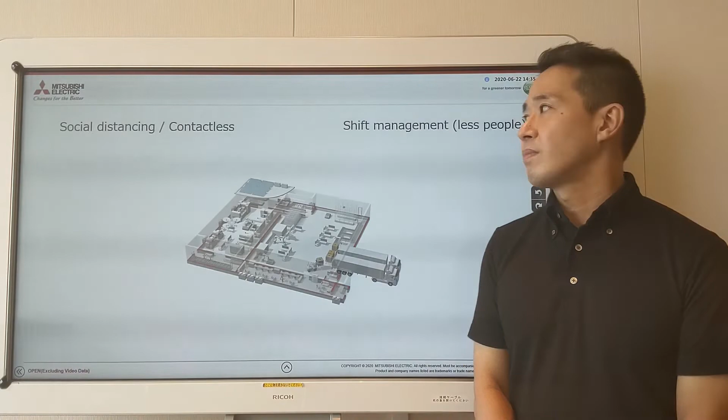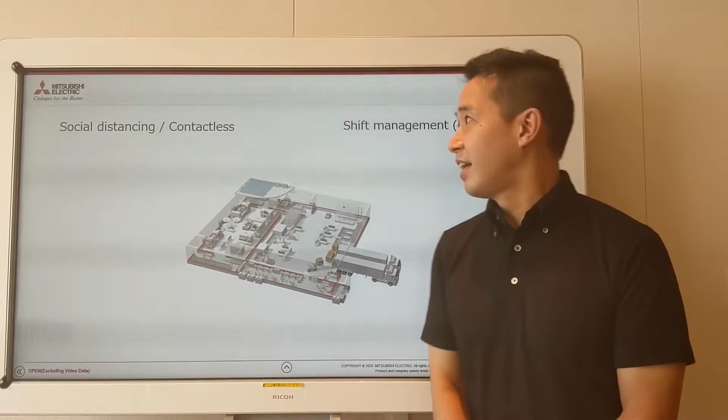What's changed inside the factory? I think there's 2 main points that have changed. The first thing is we are going to need to do social distancing and contactless. The other thing is shift management, meaning we have to manage the factory with less people.

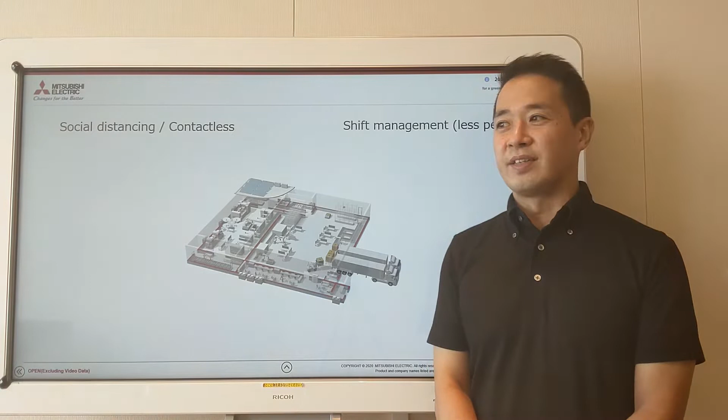First, about social distancing and contactless. I think you can imagine, every day in the restaurant you say take your social distance, but it's the same in the factory. We can't afford to have 2 people close together. They have to take their distance 2 meters away.

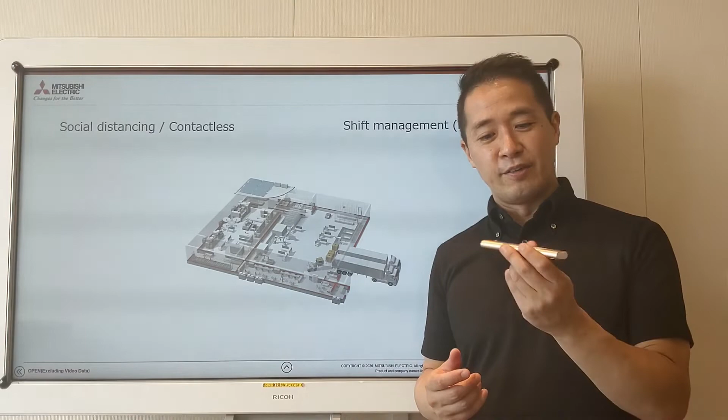And the other thing is contactless, meaning in a normal factory you would have one product flowing out the line, but in this case, this product may be the carrier that will infect everybody throughout the factory line. So you want to reduce this contact as much as possible.

In order to accomplish this, what do you need? I think there's a couple of things. Of course, doing more machining or putting more robots inside your factory line is an obvious choice. If the machines are doing the work and humans are not, then you reduce the risk of having infections.

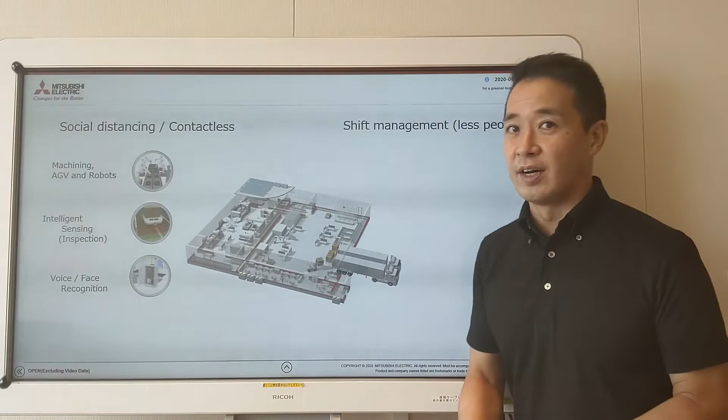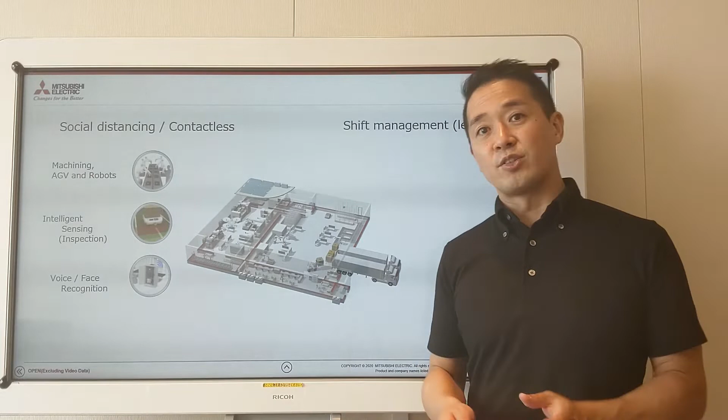The other thing is also sensing and inspection. In the previous days, you would do it by eye, using a hand, touching the product. But we have all this cool technology with image recognition and vision inspection. So why not use this technology more in the factory to avoid contact?

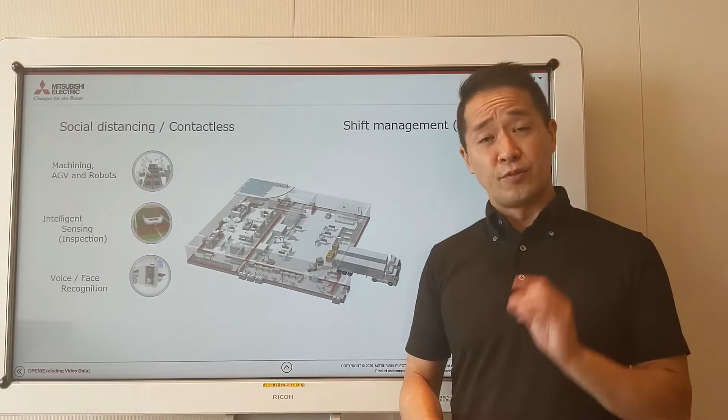And the other thing is voice and face recognition. There's a lot of buttons in the factory. You're pushing a screen, you're pushing a button, but this is also some risk to become contagious. So in that case, if you can use your voice to control things, why not?

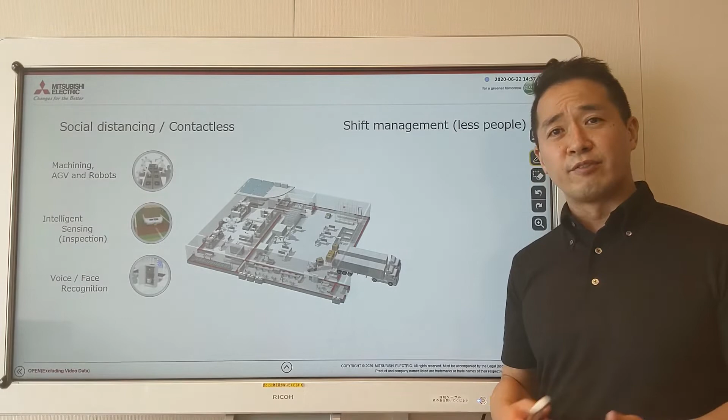The other aspect is shift management, meaning less people. We're doing this also in our factory. It's very risky to have one shift with all the crucial people for the production line working at the same time, because if you're unlucky and somebody gets infected, you have the risk of shutting the whole factory down, and there's nobody who knows how to operate the line.

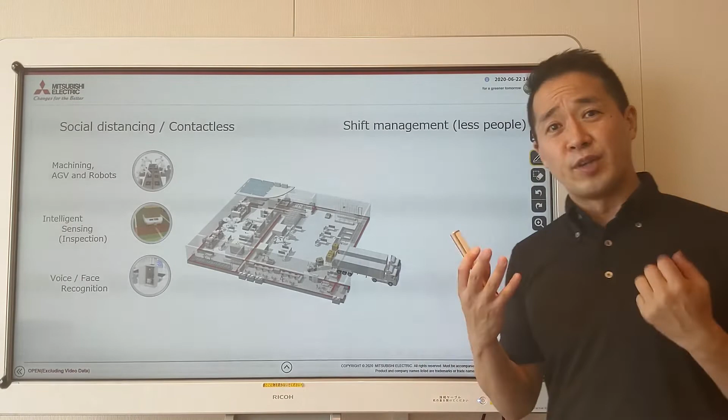So what we're doing in our factories is we're dividing up the people in shifts and making sure on these 2 shifts that there are people that know how to keep this production line running. If we can do that, even if unluckily one shift was affected, we still have the other shift able to continue production, so we'll still be operational.

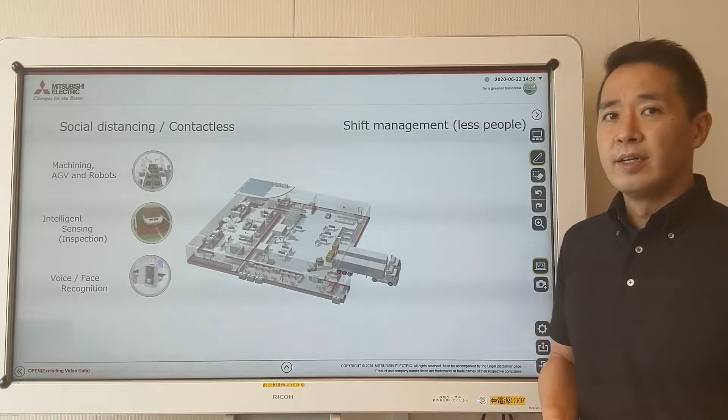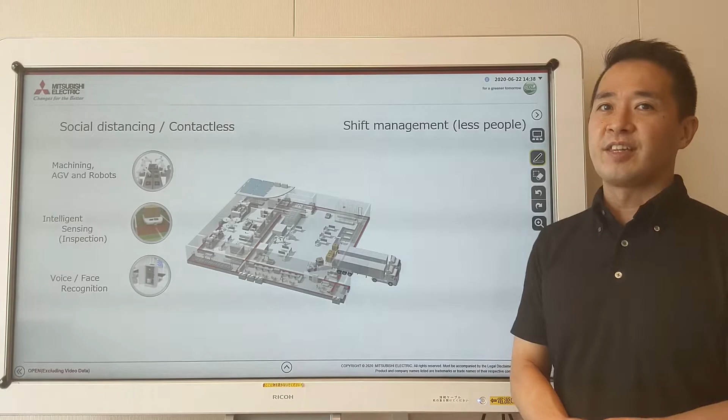So think about this. If you think about shift management, it means 2 things. One, that you're going to have to manage with less people, which means you're going to need more automation. And the other thing is you're going to have to grow the knowledge level of the less people, because there's less people to run the line, meaning they're going to have to do more multitasking. And in order to do multitasking, you have to teach them first, to educate them to learn some of the tasks or operations that they didn't know before.

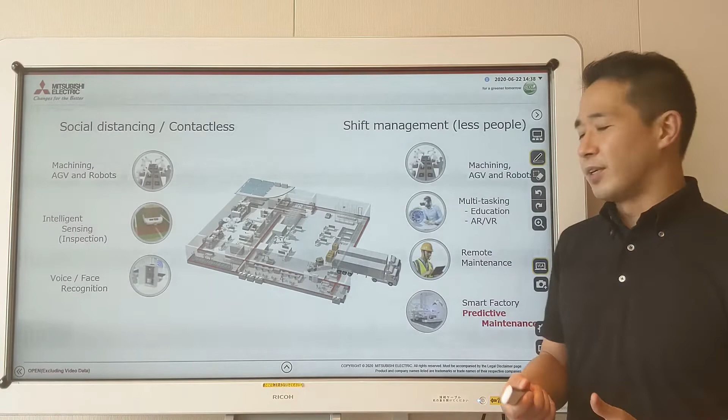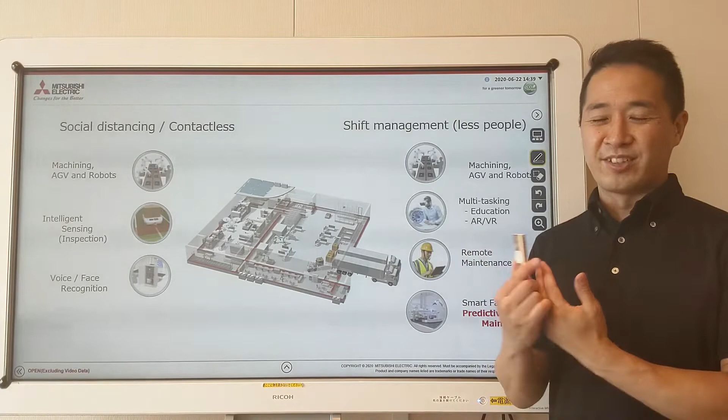It's really hard to do education now, because education is standing next to the worker and teaching how to do things, but that's not obeying social distancing. So I think we're going to be seeing more AR and VR tools to make education easier.

One more thing is remote maintenance. Of course, you can't transfer all the skills, so there will be times where you're off shift and a big problem happens in the production line, where you don't have the right staff because you're separated into two. In that case, it's vital for him to remotely access the factory, see what's going on, and send advice to the staff working on the factory floor to fix things.

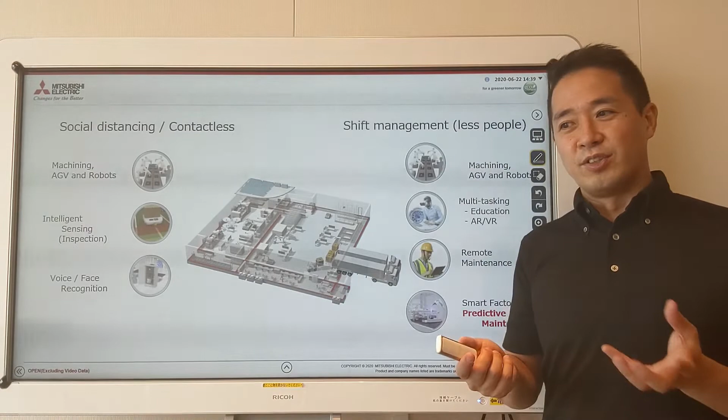And this is the same with overseas trips. In the past, big problem, you'd sometimes even send an engineer over to the factory overseas, but now you can't do that because he's going to be confined for maybe two weeks before he can get into the factory. So that's why remote maintenance is so crucial.

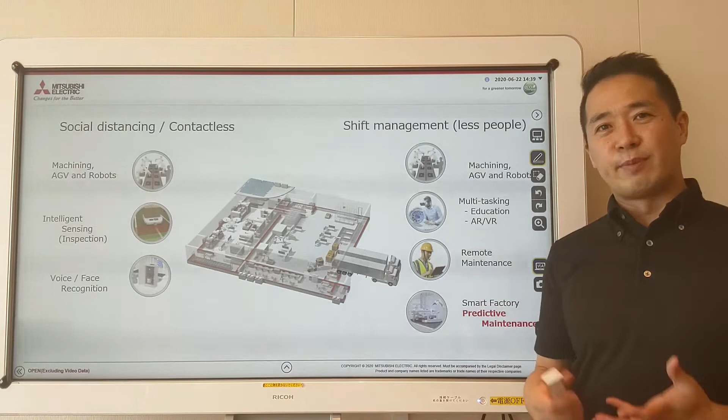The next step, and the ideal step, is making a smart factory where you don't need people to do the maintenance work. The AI and the cloud figure everything out and do predictive maintenance for you, so it's easier to work with fewer people. Today I'm going to talk a lot about predictive maintenance, which I think is very important to find problems that might occur in your factory.

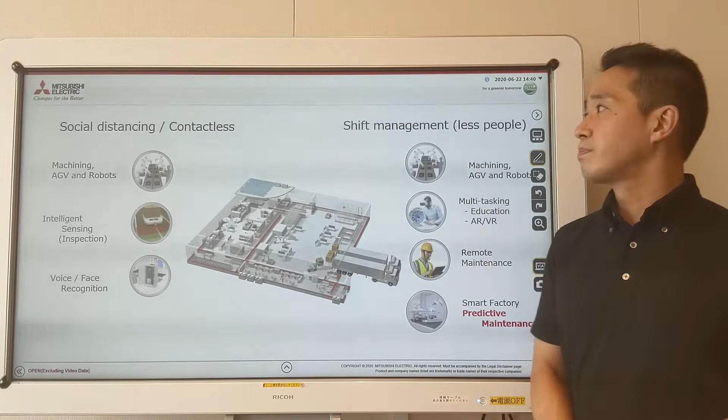Your nightmare starts here. It's the little things that start a big problem in the factory. For instance, there's a gearbox here, but this red gear breaks and the entire factory stops, and it's usually a disaster. But the problem was very, very small.

I'm going to tell you a kind of story, but I'm going to go backwards in time. Right now, there's a guy who's holding his head. It's because the factory line stopped. A machine broke down. He tried to find spare parts to fix the machine, but the supplier says, oh, hard luck, this is a special part, so you're going to have to wait two months. So he has to wait two months, and the production line is going to stop for two months. It's actually a disaster, and that's why he's holding his head.

But if you look at what happened before this, minutes before, some smoke came up, and something was wrong, and they found out there's a problem.

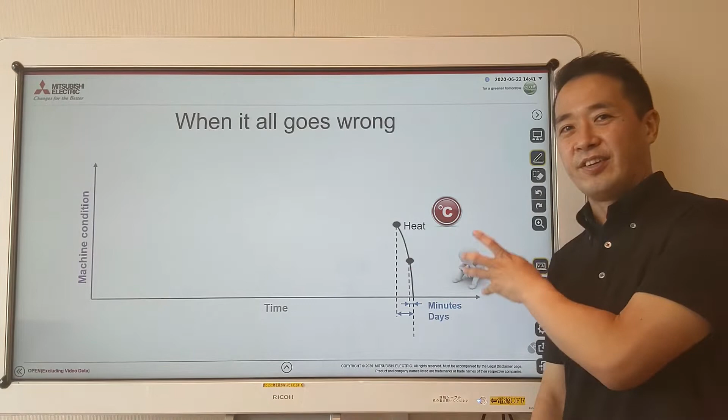But if you look at days before, actually this machine was gaining heat, it was getting a little bit hotter. If you touch the machine, it was a little hot, but nobody found out and decided to do anything about this.

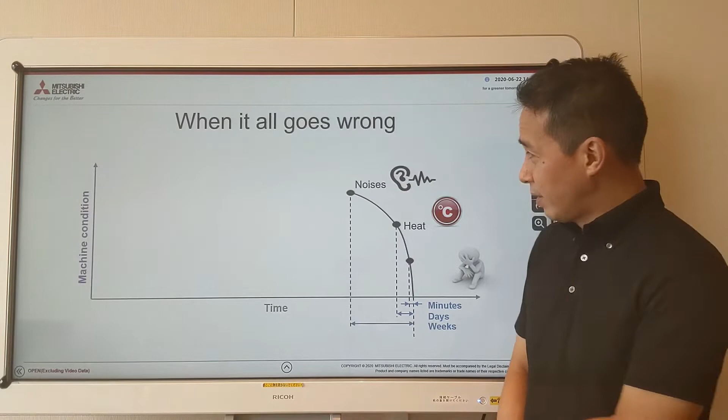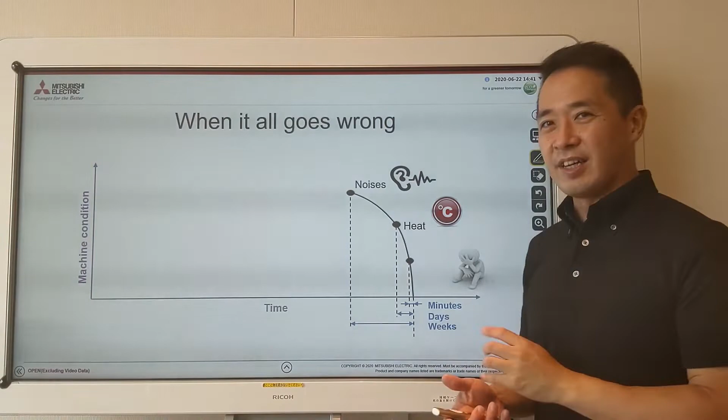Before that, weeks ago, this machine was actually putting out a very low sound that people's ears couldn't hear. But it's because a kind of screw was getting loose, and then the panel was getting loose and wobbling, so that's why they had this strange noise.

And if you go before that, actually there was a little vibration months ago, but nobody was paying attention. It was very small, so nobody noticed it. But the screw was getting loose over here.

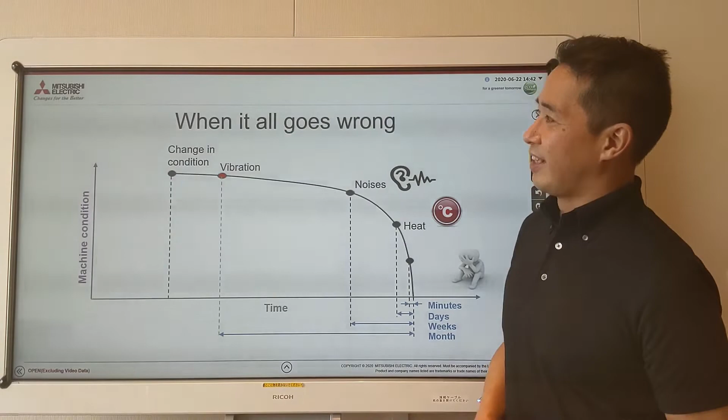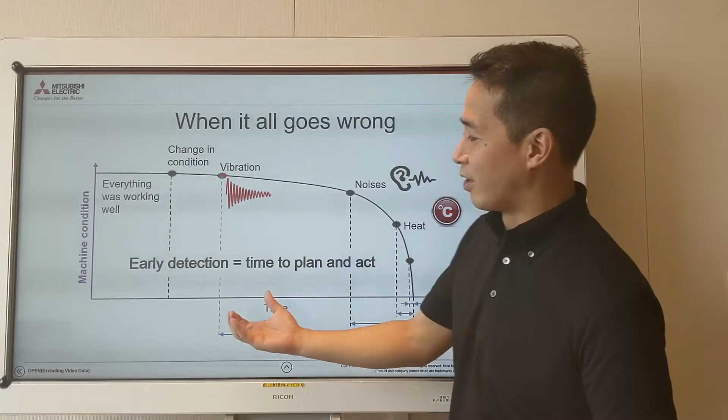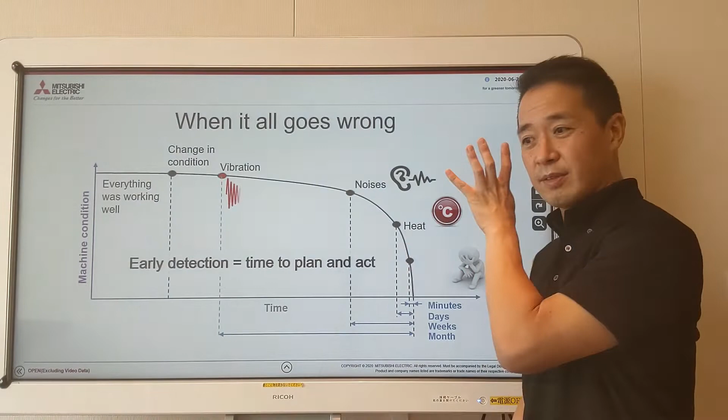What I'm trying to say is there was a change in the condition months ago, and if this guy was able to detect that before it happened, he'd be able to do something. He'd be able to say, okay, this is a bad trend, so just to be safe, I should probably order some spare parts for this. And that way, if something happens, I can exchange the part. If he had done that, he'd have the spare part in time, and he would be able to avoid this massive shutdown that he actually has. So finding out this kind of change in condition and vibration beforehand is very important. That's what we're talking about when we talk about predictive maintenance.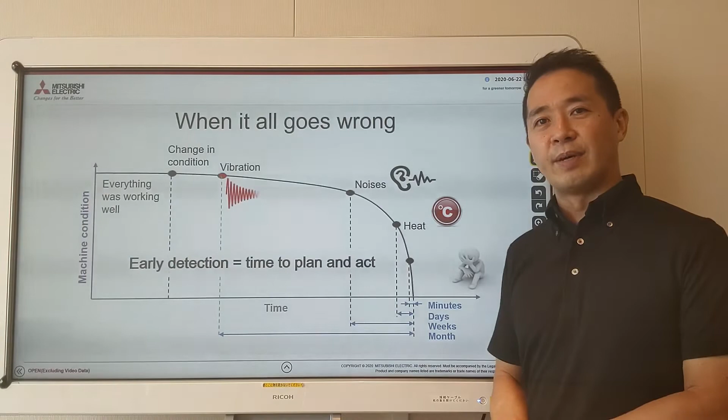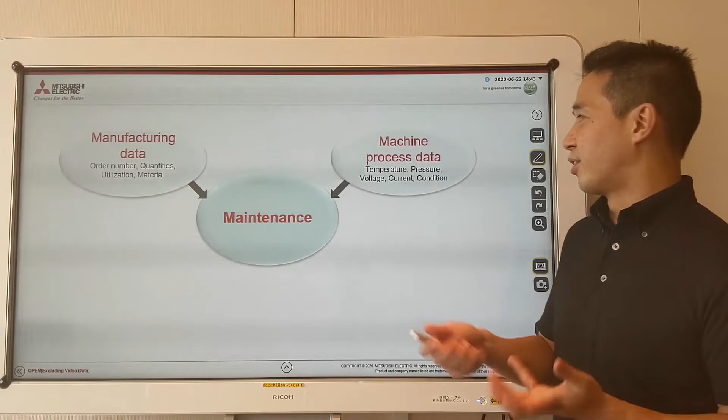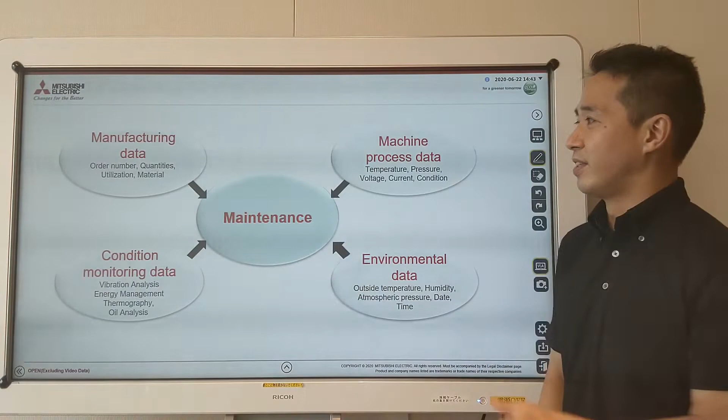For maintenance, you need data. So what you're looking at is the manufacturing data, what you're producing, the time. Also very important is the machine process data: the temperature of the machine, the pressure, the voltage of the motors, the current, those kinds of data. Also, environmental data is very important, especially in predictive maintenance. We're talking about temperature data, humidity data, atmospheric pressures, and also you need some kind of maintenance condition monitoring data, like models and mechanisms to absorb this data and figure out when it's going to break. So maintenance is about collecting data and utilizing data.

Your final goal is to install a 24-hour doctor. What I mean by a 24-hour doctor is, usually when you see a doctor, he says your blood pressure is going up or you have too much blood sugar, and every 3 months you go for a normal checkup. But sometimes every 3 months is too late in a factory. You need to find out if something's going wrong the minute it's going wrong. The best way to do that is to have a doctor always looking and checking what your health is doing. That's what we're talking about with predictive maintenance systems: installing a 24-hour doctor that is constantly monitoring the system and health of your factory.

But you can't automatically make a predictive maintenance system. It always starts with collecting data. If you don't have any data, you can't do any maintenance, you can't analyze it, you can't visualize it. So you always need to start with sensing, putting sensors on, collecting the data. Later, you can visualize this data and put it into charts. If you can put it into charts, then you can decide when something is going wrong, and if something is going wrong, make sure somebody knows about it by sending out an alert.

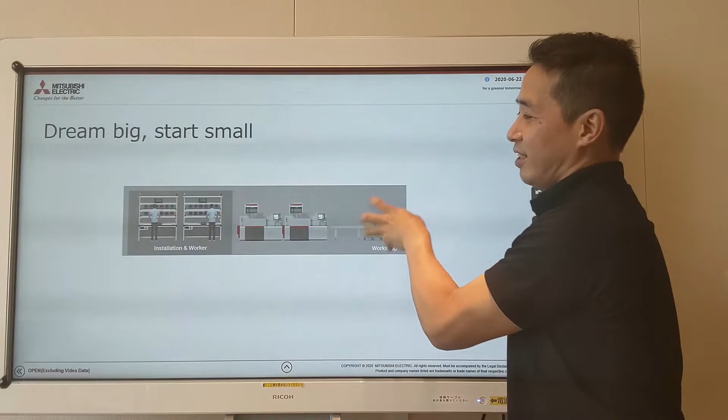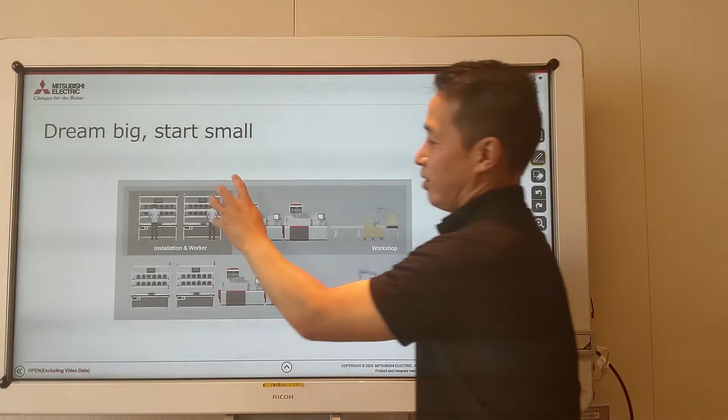Also important to know is that predictive maintenance in a factory is a step-by-step process. You don't start with the whole factory. In order to do predictive maintenance for the whole factory, you need to start with small things like a cell. When you're able to do predictive maintenance for that specific cell, then you move on to the next machine, and the next machine. If you're able to do predictive maintenance for these individual cells, you'll be able to do it for an entire production line. So first things first—you're dreaming big, but actually starting small. After you do the factory line, you move to another factory line, and finally you'll be able to do predictive maintenance as a whole for your factory. But everything starts with the individual machines.

It looks a little complex, but depending on the way you do it, there are simple ways to do predictive maintenance, and I want to show you some examples of how simple it can be. I'm going to start with the example of a wastewater treatment plant in a small town in Germany. Let's go into the details.

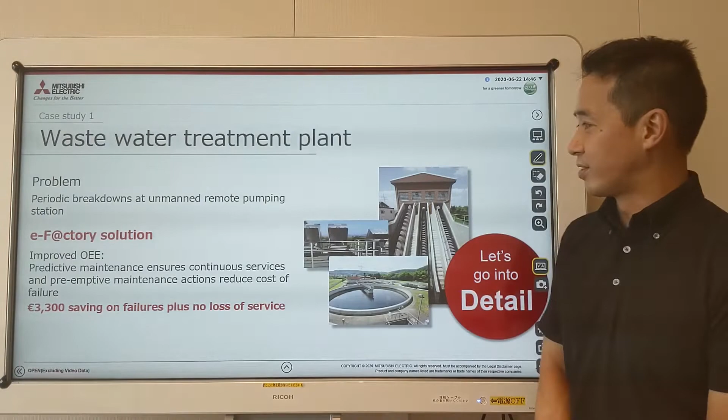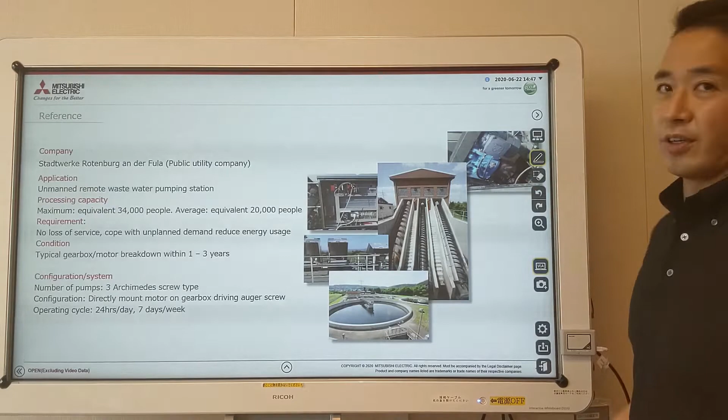This is the application: it's moving wastewater from the bottom side to the upper side, and it does this using three Archimedes screw pumps. These are moving by using a gearbox and a motor, so rotating. The issue with this application is this is an unmanned plant, meaning there's no person working in this facility, and the screws break anywhere between 1 year and 3 years.

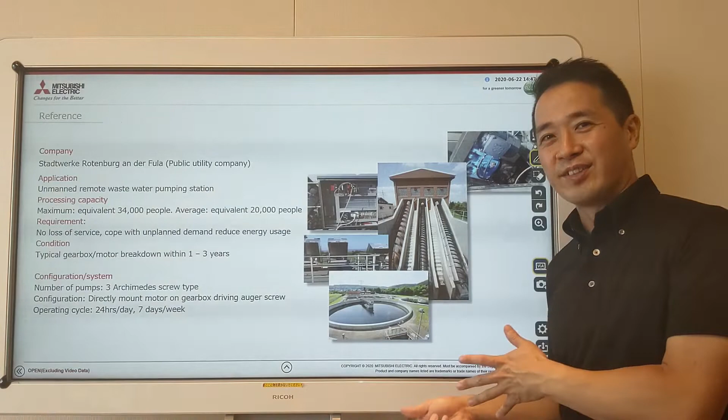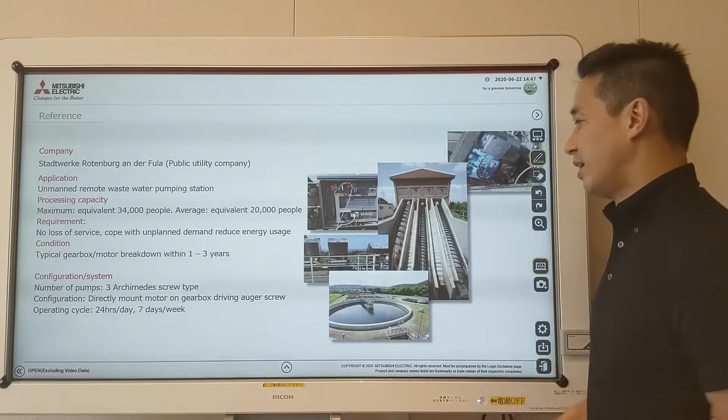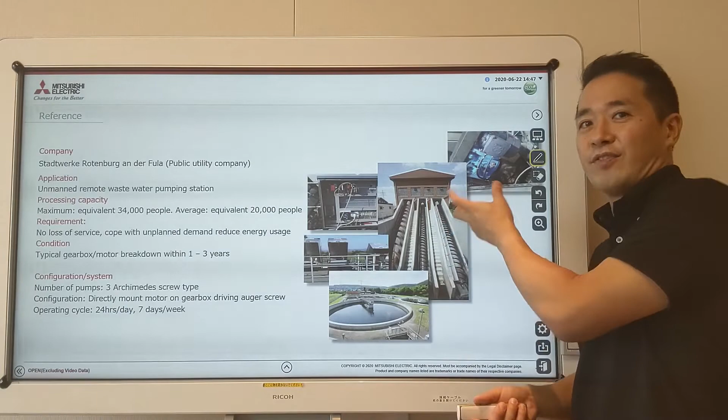So you can never predict when it's going to break. The reason is, when it breaks depends on how much garbage people are throwing into the wastewater. If a lot of people throw a lot of garbage in the wastewater, the load on the screws becomes bigger and it will break faster, for instance in 1 year. On the other hand, if people aren't throwing away a lot of garbage and the water is clean, the load is less, so it might last 3 years—but you never know. This depends on everyday life.

So what they wanted to do is periodic maintenance, meaning every 6 months they go and check to see if everything is okay, then go back. But sometimes they got an alarm that it was suddenly breaking and everything was overflowing, requiring immediate action. They wanted to fix that and be able to predict when it would break, so they could fix things before the actual trouble happened.

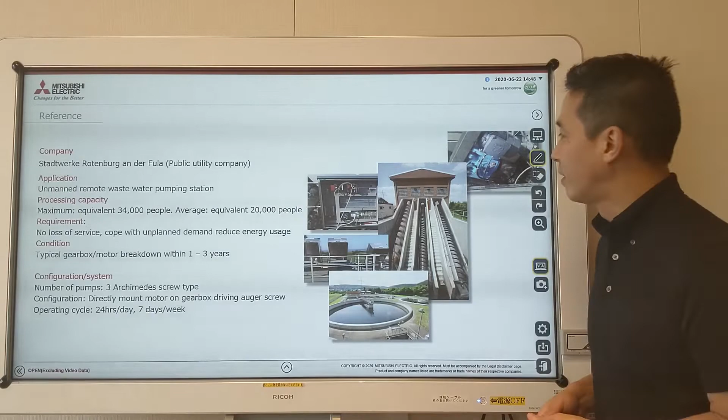So what they did is they installed a predictive maintenance system, a 24-hour doctor. It's very simple. When you think about predictive maintenance, a lot of people think you have to put sensors all over the place. But if you look at this specific application, usually the gearbox breaks 95% of the time, because the screws are connected to the gearbox, and this has the most load.

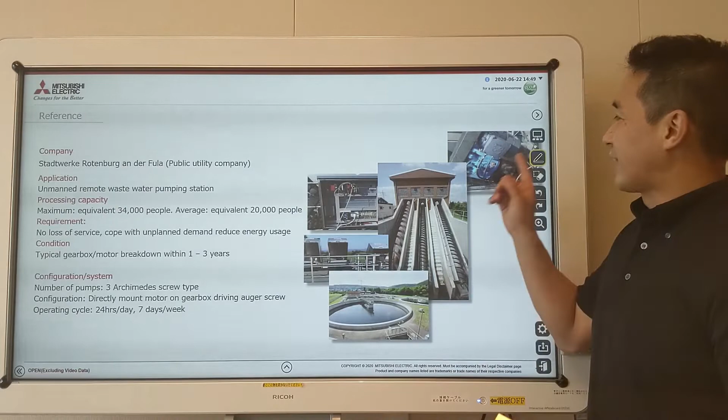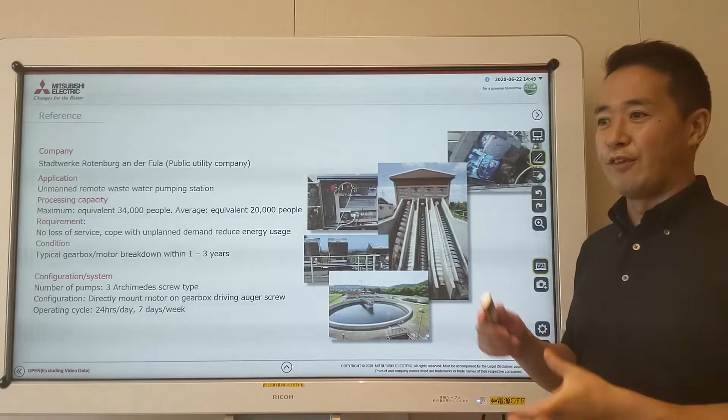If you look at the gearbox, it's connected to a motor that's rotating the gearbox. And what we did in this case was we put a smart vibration sensor on the motor, because if it felt more vibration, then we know something's happening, something's going wrong in the gearbox, and then we could send out alarms. So it's a very, very simple system.

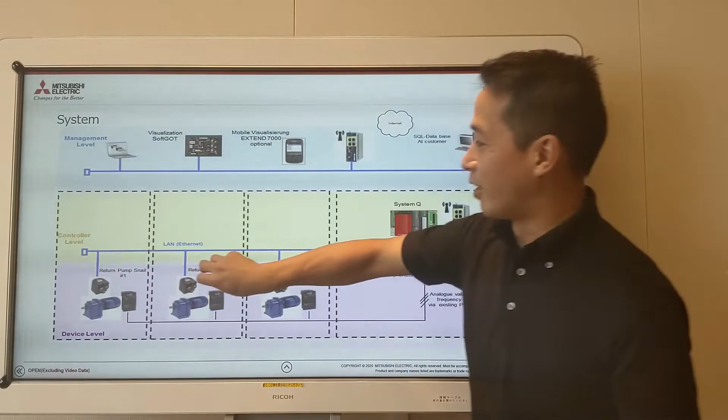As I said, we just have 3 smart vibration sensors placed on the motors on the Archimedes screw pumps, connected to a PLC, and then remotely we connect this to the central maintenance center.

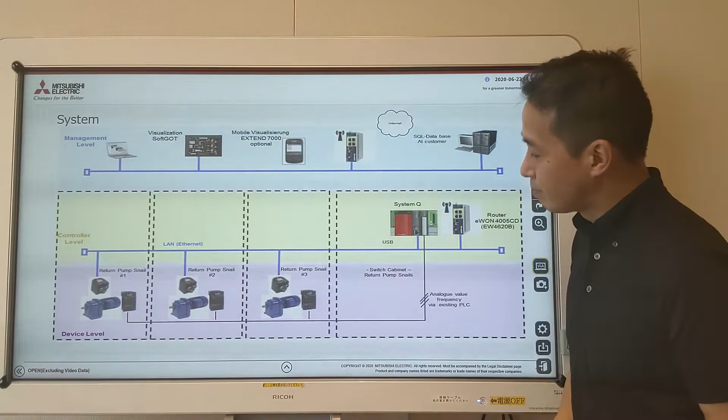So what's the benefit of this? First of all, if you wait till the gearbox breaks, a new gearbox costs about 5,500 euro. On the other hand, if you can fix the gearbox before it breaks, an overhaul costs only 1,000 euro. So you save 4,500 euro just by doing this.

The other obvious benefit is you don't have any complaints from the city if something goes wrong, and it's not an emergency to handle these kind of situations.

So the cost of this was roughly about 5,700 euro, meaning that 2 gearbox failures is about 11,000 euro. So if you think about that, 2 breakdowns, and then you've already saved the condition monitoring system you've invested. So the ROI is very, very simple and achievable.

And it's a very, very simple application, as you see. And we were able to develop this with the partners, with Schaeffler, with a system integrator, and we did the remote connectivity with eWON and HMS.

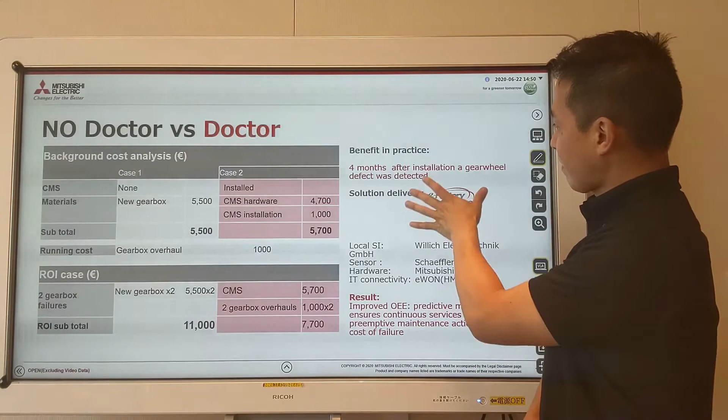And luckily, it worked. 4 months after the installation, we got an alarm that the vibration patterns were not so good. It was different, and we went and found the gear wheel defect. So it's a very, very simple solution, but very, very effective, and you also get the ROI.

Next, I want to talk about maintenance on the edge. Lots of people have this image of doing predictive maintenance in the cloud, but in reality, you have no time to talk to the cloud when you're doing predictive maintenance.

Think about a smartwatch where you're monitoring your heartbeat. If something goes wrong with your heartbeat, then you immediately have to call an ambulance, and you have no time to do the analysis. It's a split-second decision you have to make. And that's exactly what the factory is.

We're moving in not seconds, not days, not minutes. We're moving in the millisecond world and the microsecond world with processing and all this precise information. And if you're a split second late in reacting, you're going to damage a very, very expensive machine or a very, very expensive part that you're producing. So that's why timely reaction is so important for predictive maintenance in manufacturing.

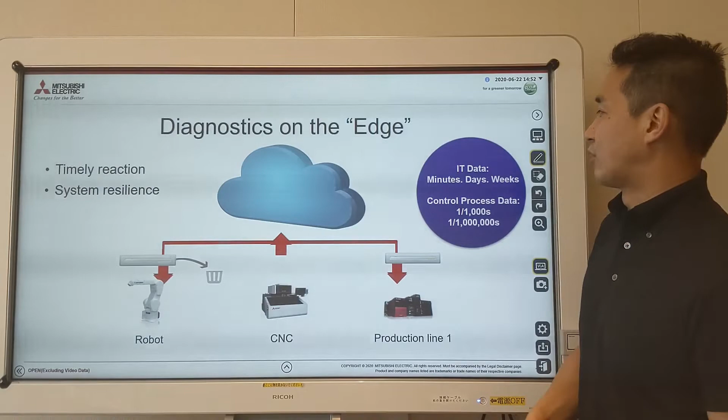Everything has to be on the factory floor with an edge computer. I have another YouTube video about edge computing, so if you're interested, you can go check it out and see why edge computing is so important for the factory floor.

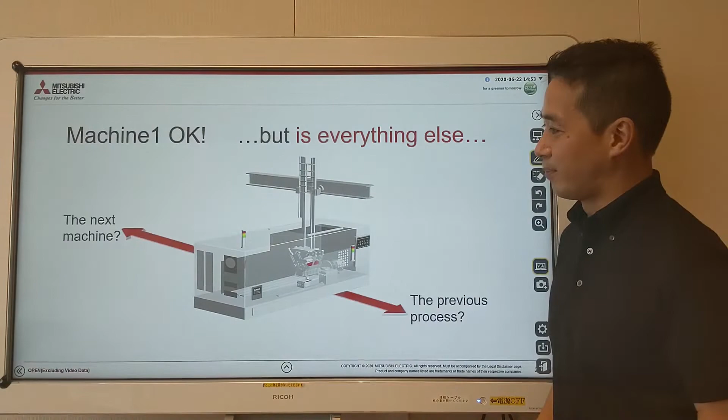Okay, so we put predictive maintenance on one machine. We're monitoring the motor, vibration on the motor. But the issue is that we're so interconnected right now in our factories. Even if you can predict something and predict a break on this machine, you have to think about what happens before in the process and what happens afterwards.

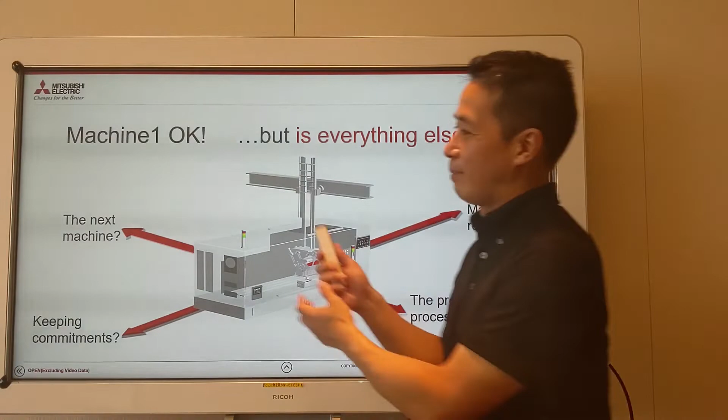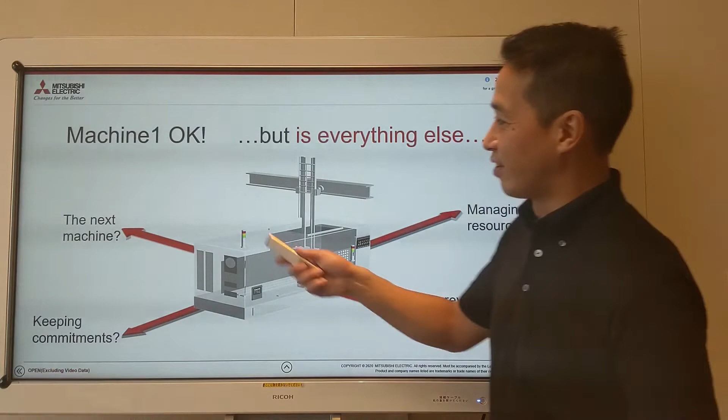Because if this machine is going to break and you have to do maintenance on it, that means you're going to have to stop all the manufacturing processes before this, and the other manufacturing processes after this are going to be stopped as well. You have to think, okay, this person that's managing the machine has nothing to do, so maybe I should put him on another task.

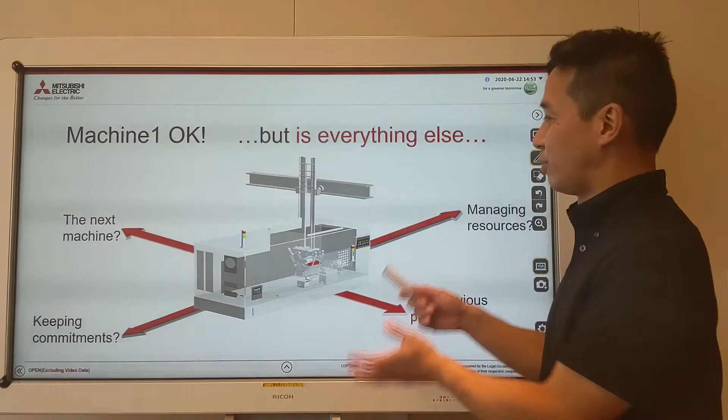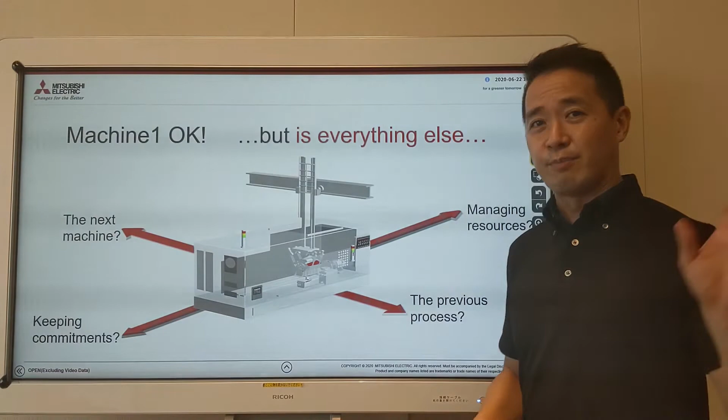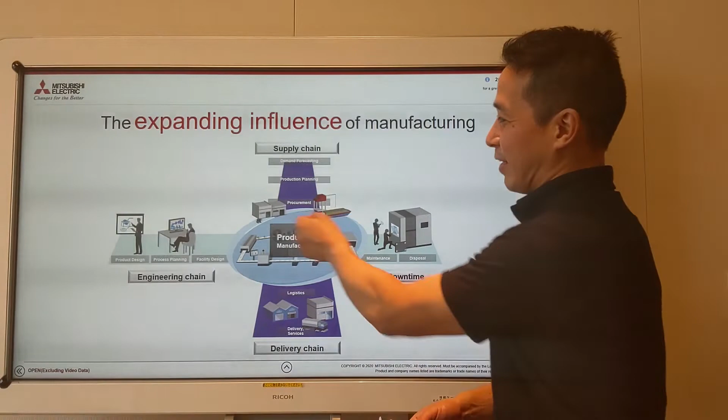You have to think about parts incoming from your suppliers. Maybe you need to fix a machine for 2 days, so you tell the supplier to wait, you don't need product then. In the past, this was done by experienced factory staff who knew who to call and what to do. But it's becoming more complex because the supply chain and delivery chain are so interconnected, and engineering chains are connected too. Managing the impact of what happens here on over there is very difficult with the human mind.

That's why I think AI will have a bigger role in the future, because AI has the capability of figuring out what impacts what when something goes wrong.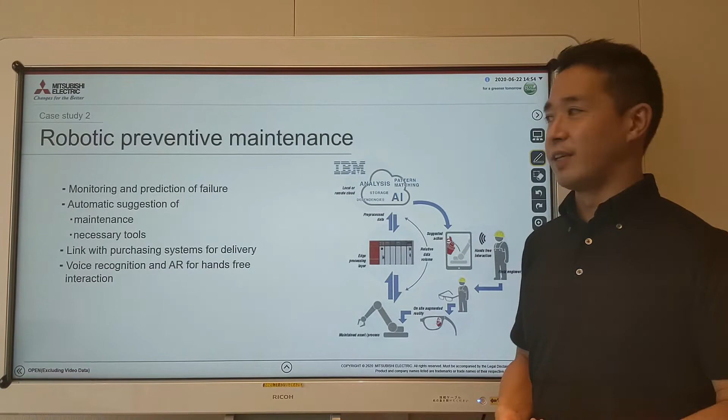This is just a sample application, I have more detail in my Smart Robots presentation. We're monitoring a robot with an edge computer, and in this case we're talking to IBM Watson AI, figuring out when something's going to go wrong and what to do about it. This is the actual maintenance screen, detecting what's going wrong.

We have a robot that's going to fail, and in the future I think it will be like this: a chatbot box opens, we talk to the AI, and the AI tells you exactly what to do.

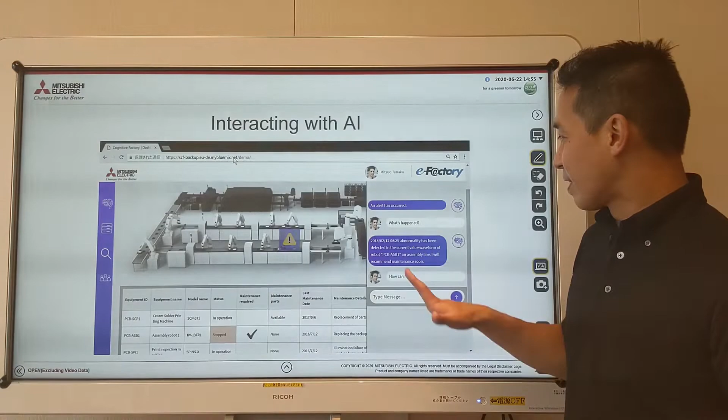In this case, it says there's a current value, a bad waveform in this robot, so here are your maintenance options. You check one, and it tells you we have these parts in stock, so it's okay to do maintenance, or we don't have it, so I'm going to go to the SCM system and order it for you.

Is that okay? It's going to be easy, because the AI decides everything for you and tells you the right options, adjusting your maintenance schedule. I hope this technology becomes more and more refined.

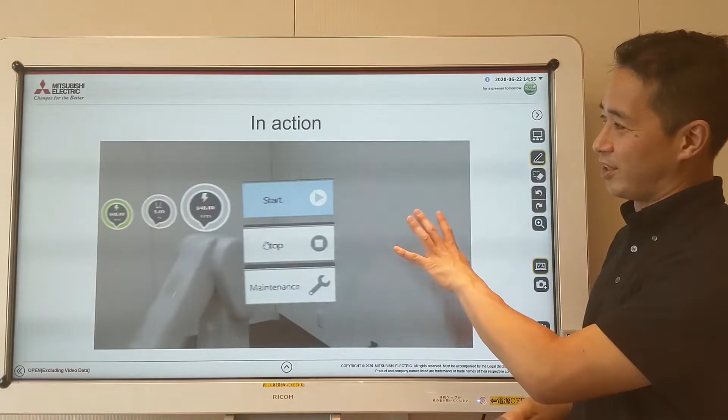At the end, you put on your AR glasses, go to the machine, and it's exactly going to tell you how to repair this machine. It's pretty neat. I have more detail in my AI applied to robots presentation, so if you're interested, take a look.

I think one of the points is making life easy for you. Not a lot of people have detailed knowledge about predictive maintenance, so that's why we, as Mitsubishi Electric, want to help you with these issues.

As your first steps, it's always visualization and remote maintenance. We have good SCADA solutions and remote HMI solutions for you. We have a lot of edge computing solutions so you can pick up waveforms in the millisecond time frame, and also do simple analytics with IPCs and real-time data analyzer software.

We have solution packages, so you don't have to do a lot of programming or make screens yourself, plus vibration sensor solutions working with partners.

At the end, one of our goals as Mitsubishi Electric is to embed these predictive maintenance functions into the components themselves. For instance, if you have a robot, the robot is going to tell you when it's going to break. I think that's a lot better, because you don't have to set up your own predictive maintenance solution. All you have to do is buy this robot, and it's going to tell you when it's going to break. We're putting this functionality into our machines, our CNCs, our inverters, and our servo motors as well. So I think this is a good start for predictive maintenance.